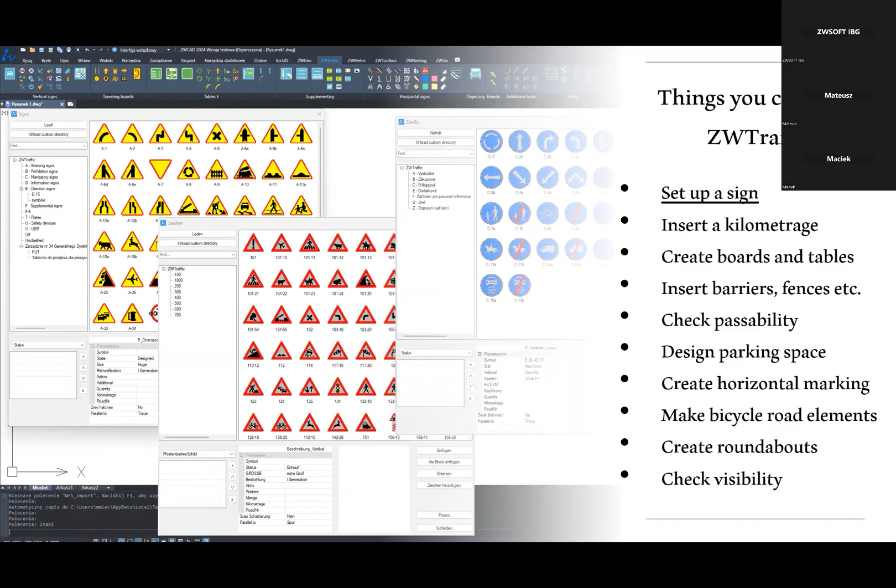Each sign already made in the program is in the form of a block. You can do plenty of options with signs, for example inserting them, reversing, adding additional information, or changing them, but that will be shown by my colleague later.

You can also make a kilometrage of road, for example for the signs or elements you're implementing on your road, as well as, for example, stops which are every 100 meters.

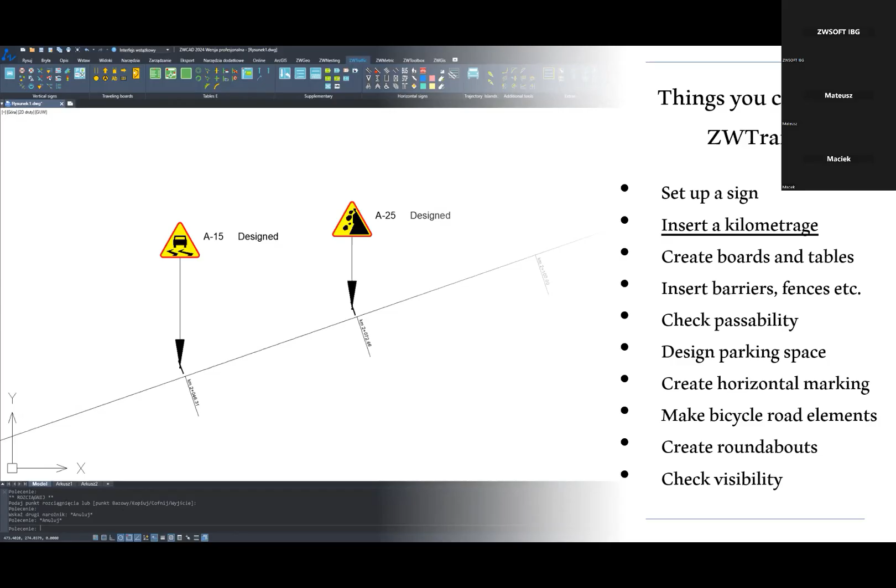The application also has plenty of functions to make custom boards and tables. For example, you can see now making a directional table with a road number, road color, town name, distance, and other additional information like arrows and kilometrage.

But there are also plenty of other tables and custom boards you can make. For example, collective information board, diversion roads, direction lane assignment, highway exit, or roundabouts.

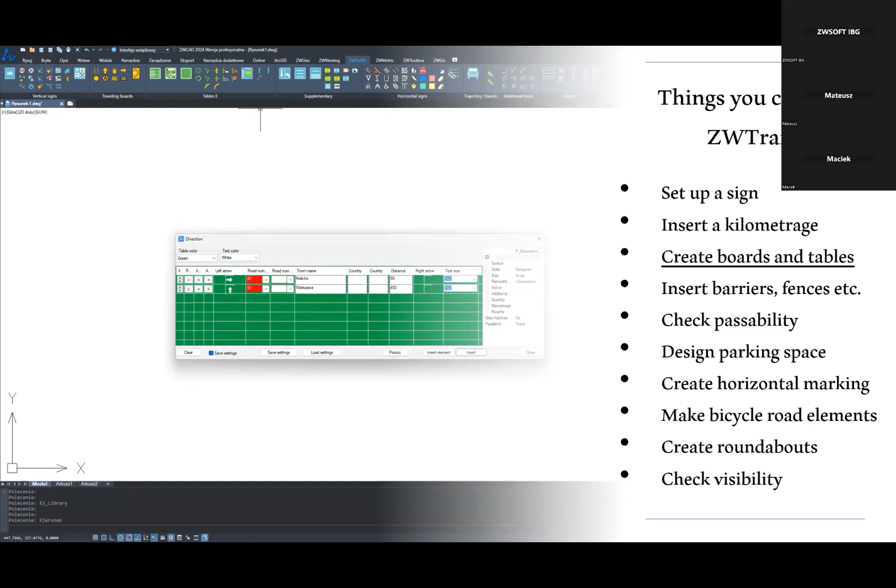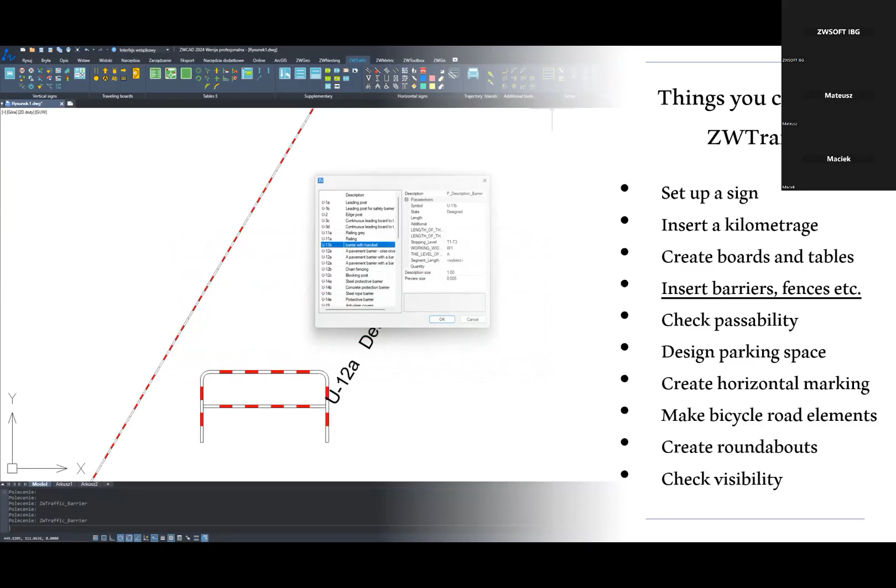You can also label and insert elements which are next to the road. For example, barriers, railings, fences, concrete barriers, permanent warning tapes, road cones, or retro reflectors.

There is also a tool to check passability of a vehicle. The ZWTraffic has a library of vehicles with specially made sizes. You can insert the vehicle view into your drawing if you need.

You can change the coloring and elements you'll be using, but basically you can check by moving a vehicle or drawing a line and checking if the vehicle is able to fit on your road.

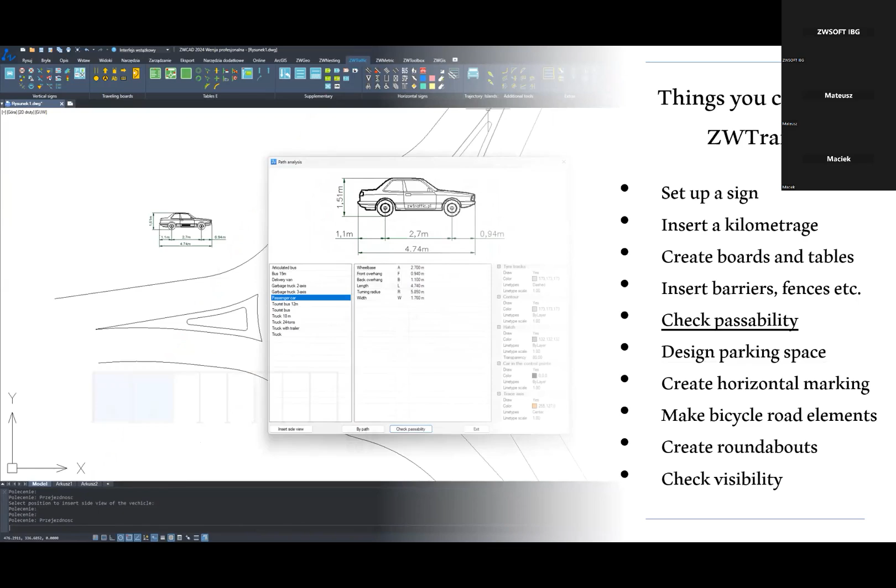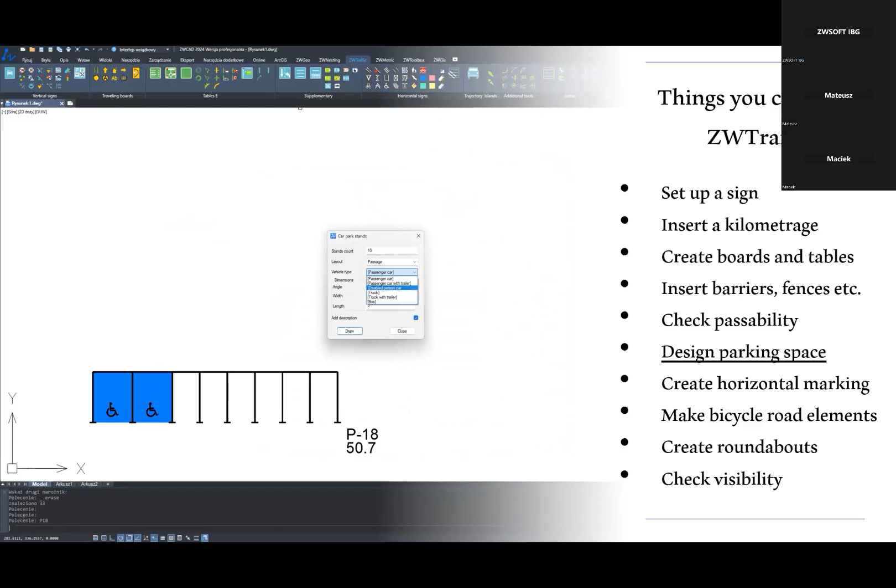You can also use our tool to create parking stands. This function has plenty of different options besides the elements of these car parks. You can change vehicle type, ways of placing or layout of these car parks, and also use various angles and dimensions for these elements.

There are also tools to create horizontal marking, such as making lines in the middle, left side, or right side. There are options to create bus stops or horizontal signs, directional arrows, and symbols that will be placed on your road.

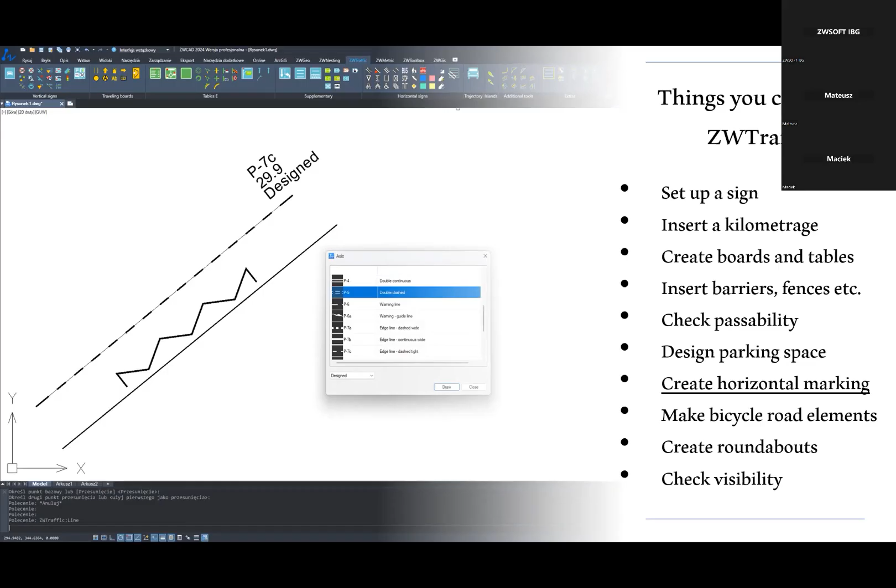Also, there are a few options for bicycle users, such as making bicycle trails, signs for bicycle roads, or just road elements, for example as you can see in the example.

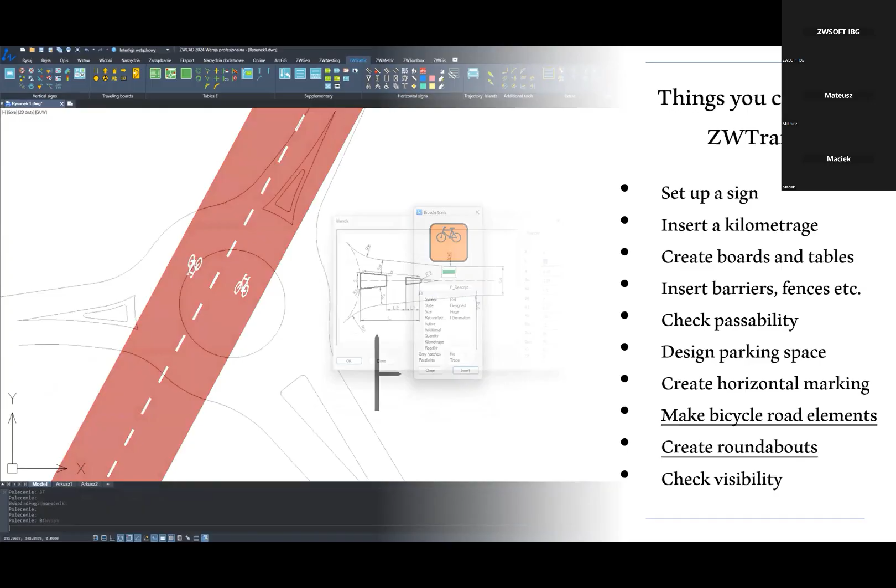Also, there are a few features to make roads or connecting roads to a roundabout, for example islands or access roads with parameters that you can change and adjust. Basically, it's just 2 clicks and you already have made roads, which normally you would need to spend some time to prepare.

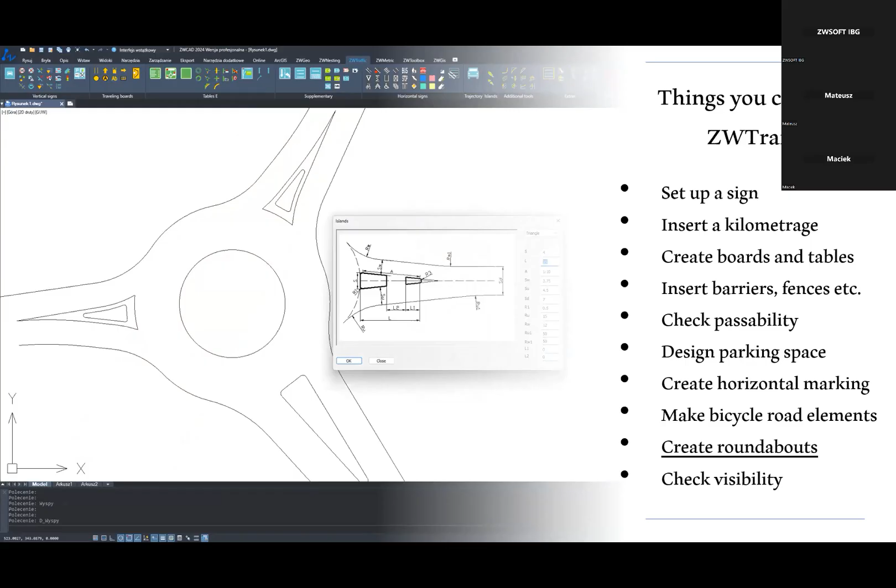There's also a visibility feature in which you can set up a few situations in which a car is placed, for example starting from a crossroad or coming to a crossroad. You can change the speed of the vehicle, car length, or elevation. Everything will fit into a visibility field.

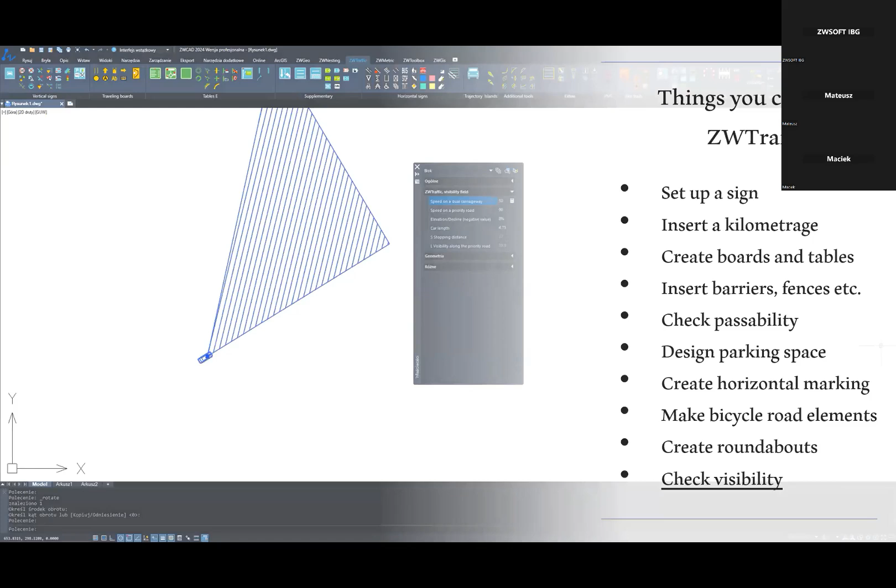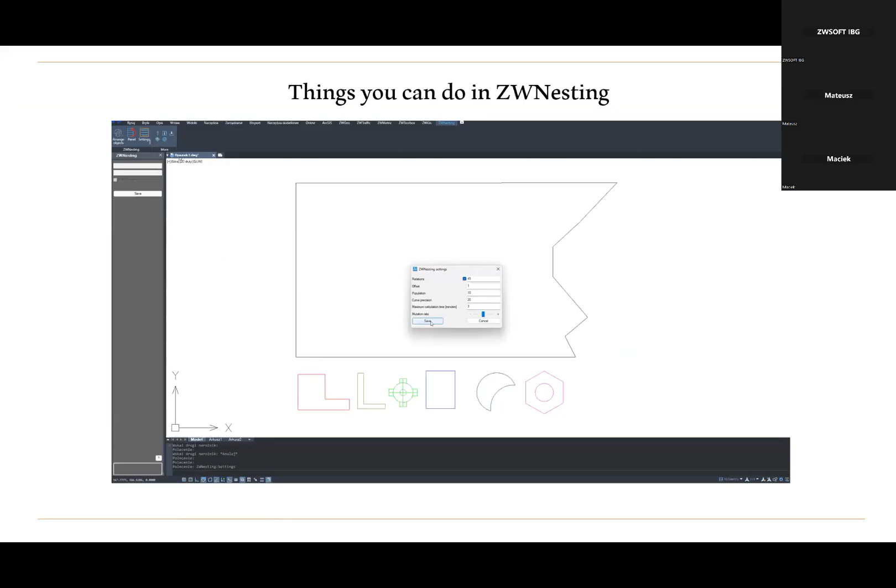You can choose in the settings a few features about the degree of rotation of elements, if they should be rotated. You can change how the application should calculate placing them, and of course you can change what objects should be placed inside. As you can see, this is a simple example, but the calculation is pretty fast and it finds the best possible solution for those elements.

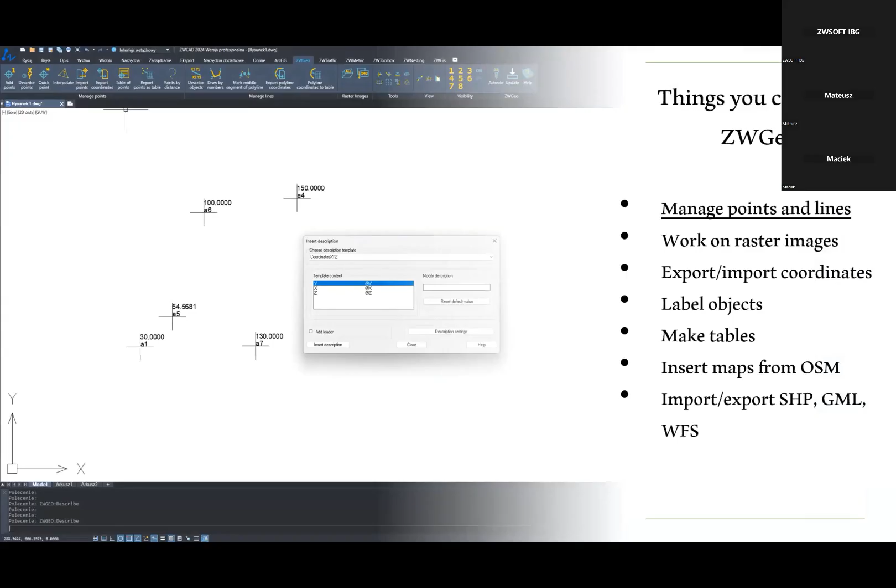And the third add-on we'll be showing you in a moment is ZWGeo. ZWGeo is an add-on for surveyors, which has plenty of features for working with a map, lines, and coordinates. For example, there's a big focus on coordinates, elevation, and number of points.

You can label points with additional features such as elevation or their distance. You can also interpolate the position of any object based on 3 points and their elevation.

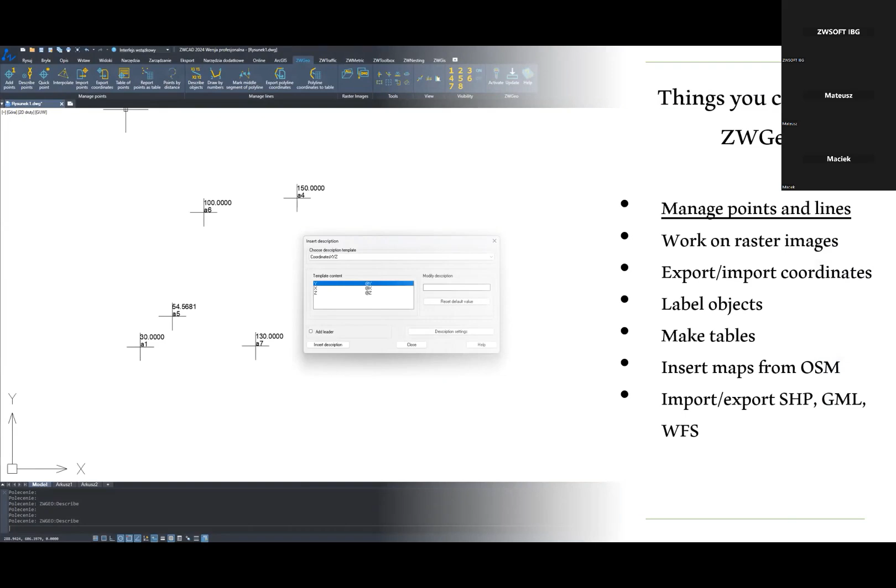ZWGeo also supports working on raster images, and there are a few functions to do so. For example, importing plenty of raster images to your drawing, or cutting a map to fit your size.

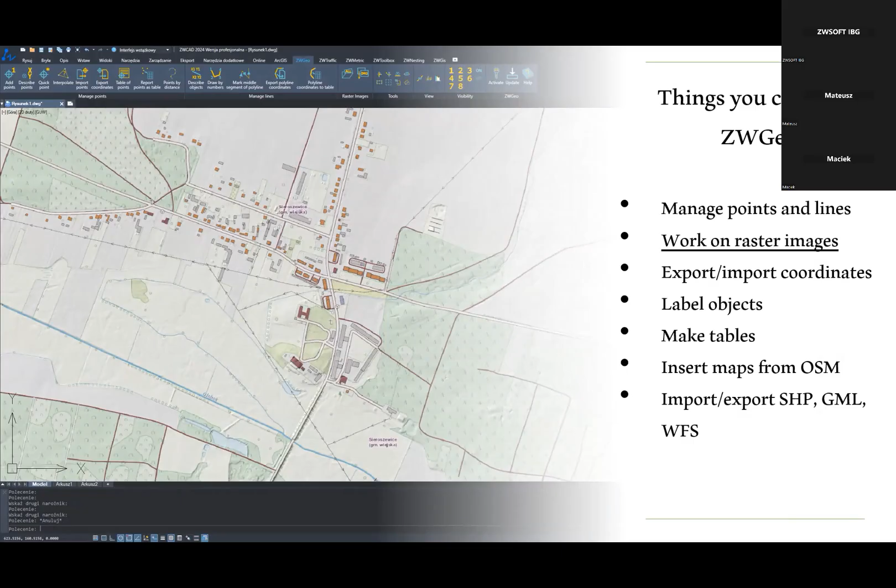This add-on also has plenty of options to export and import coordinates of points or lines, and it can be done in TXT or CSV file.

Labeling objects is also important for most surveyors, so we have plenty of tools for that. There is, for example, labeling polylines with blocks, if you need to make them in the middle of a polyline, as you can see in the example. You can also label polylines with the proper layer they are on, and label the distance of each segment. There are also ways to point coordinates and label them easily. You can also create fences by choosing a block and a distance at which they need to be placed on a polyline.

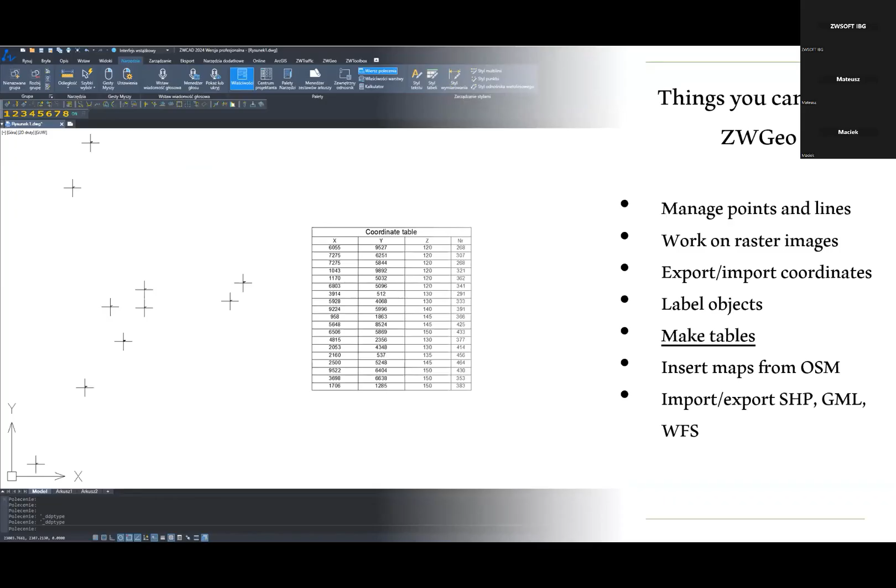A pretty important function in ZWGeo is also making tables. There are a few tools to do that, and you can also insert them into your drawing. There is also a function called the active points table, in which selected points or lines can be edited directly in the table, and every change you make will be placed directly on your drawing.

The application also has an easy connection with OpenStreetMap, where you can choose any place you want and easily place it in your drawing.

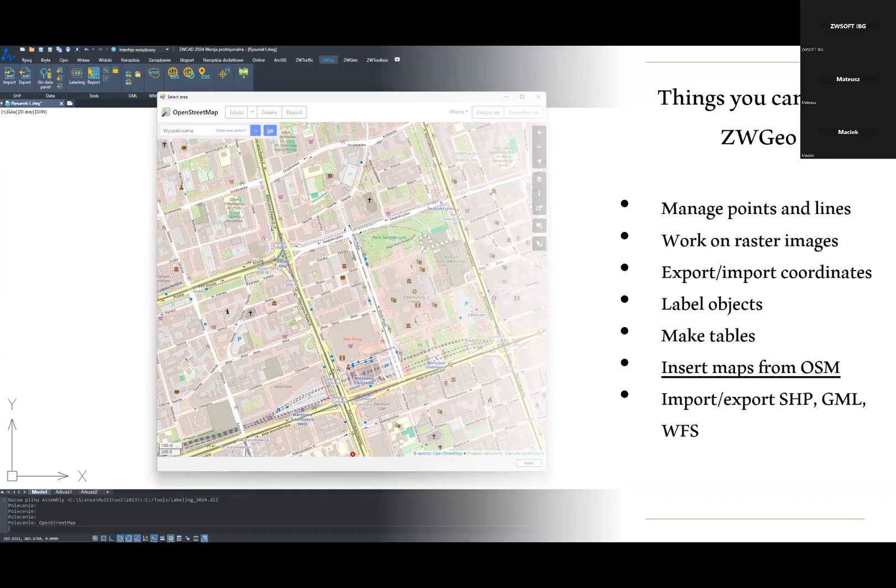Also, ZWGeo has support for GIS data, for example SHP files, GML, and WFS. You can easily import or export them, modify them, work on their properties, and label them when putting them into your drawing. Also, there is an easy way to make reports for your data.

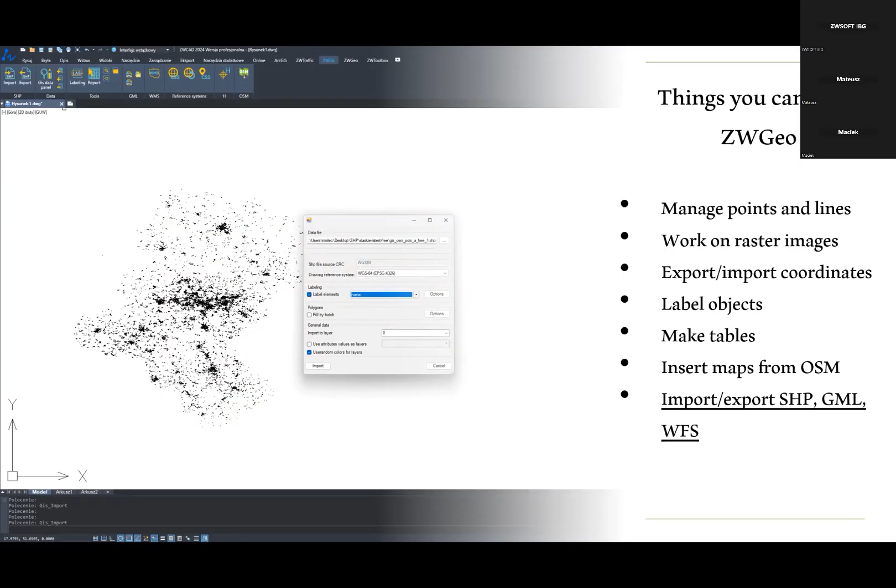There is also an option to download data from WMS servers, but this function is currently available only in Poland. That's pretty much all from my side.

Before I let Mateusz do the real life work example, let me mention one more thing: if you need any special features for your ZWTraffic, Geo, or Nesting, such as what we did for the Czech and German versions with their dedicated library of signs, or need some changes, for example with the reference system that's important when working on maps, you can always contact us, and we can try to work on making a suitable version for you.

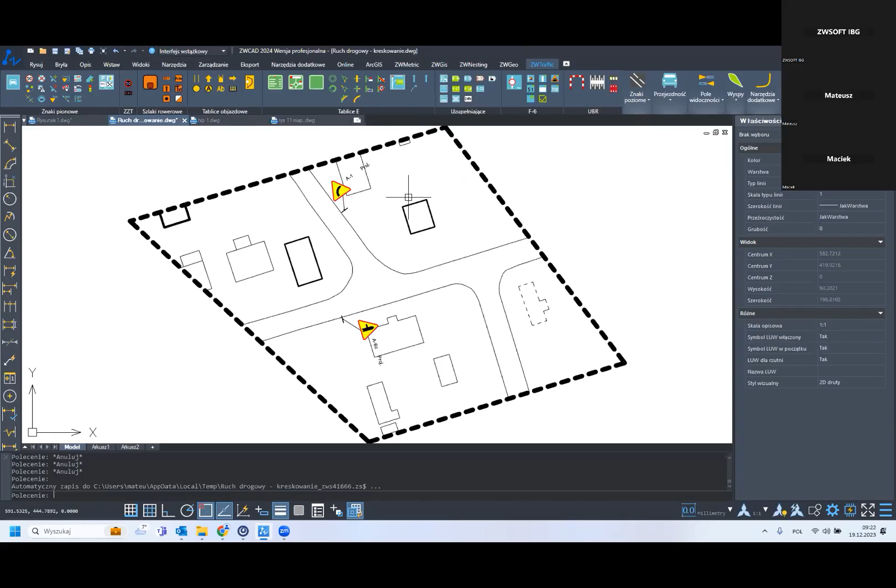Firstly, I'm going to talk about ZWTraffic because I know it the most. You can always use the commands by clicking on the icons, but it's a good idea to put the icons on the screen as a toolbar. To do this, you need to type the command 'toolbar'. So I'm using the toolbar command, and now I can choose any group.

In basic ZWCAD you only have one group here. I have ZWCAD, but I also installed many add-ons, so I have ZWGeo, ZWGIS, Metric, Nesting, and Traffic.

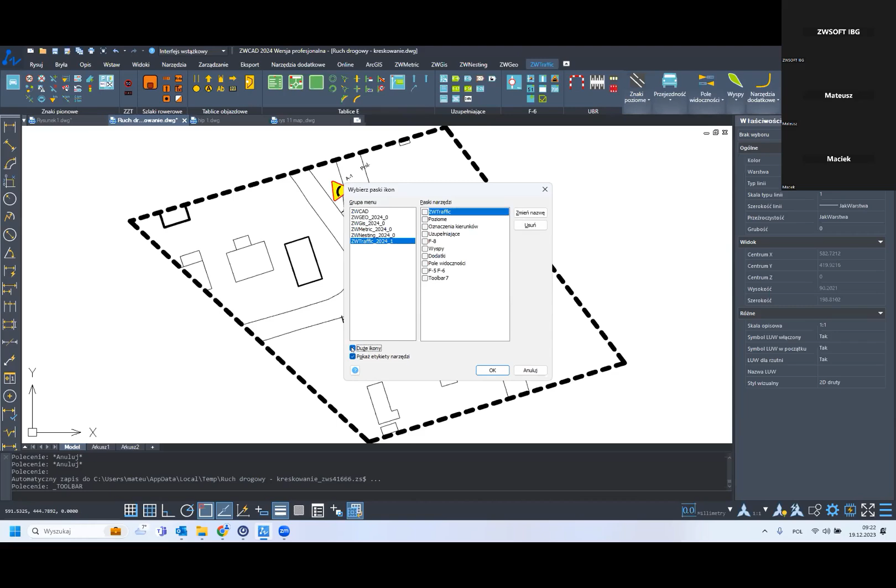If you are using a few commands very often, you can always pin a toolbar somewhere to the screen, and it looks like this. I'm going to turn them off for now. So if you want them, you can tick them; if you don't want them, you can always turn them off. If you want the icons to be large, just remember to tick the large buttons here. So I'm clicking OK, and let's move to what's most important, which is checking how these add-ons work.

We'll start with ZWTraffic, as I said, I know it the most. This is an add-on which supports work in designing traffic, something like this. Its main task is to quickly insert vertical and horizontal signs and create their list. We'll demonstrate this with an example of such a map.

Firstly, we'll try to insert a give way sign next to this road. We don't know how to do this. We just started the application, the program for the first time ever. What to do now? This is the most important thing I'll tell you today, so just focus. You don't know how to use any command, so...

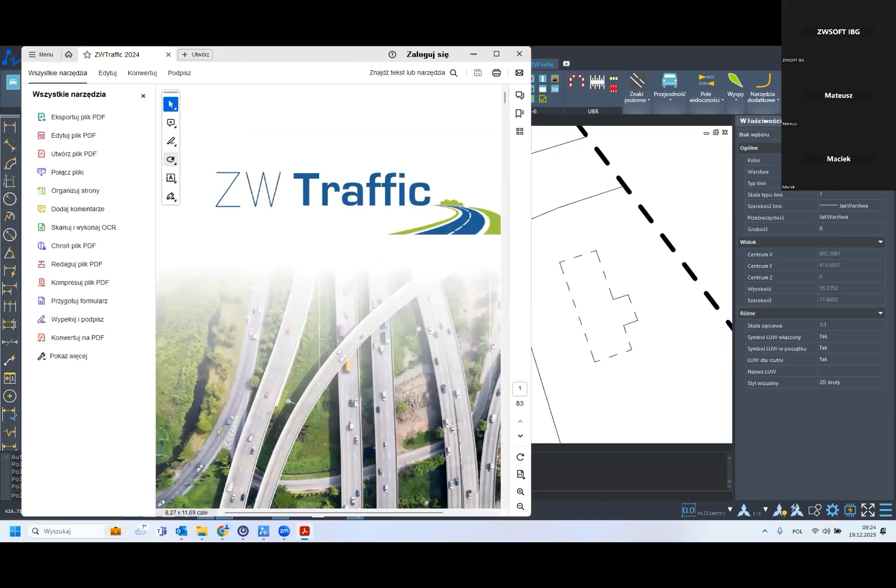Somewhere among our icons, we can find a textbook with a question mark, and it is here. If you click on a book with a question mark, a manual will appear. If we click in it, you can read how to use any of the commands in the program. I'll turn it off for now, but the manual is not everything.

Sometimes you need to do something really fast, and what to do then? If you need speed help, you can always call us, or write to our tech support. If you go to ZWCAD.pl, you can always contact us, calling this number or writing to this email. You can always use a live chat, which is here. So if you have any problem using our add-ons, just remember you can call us and ask how to use a function, how it works, okay?

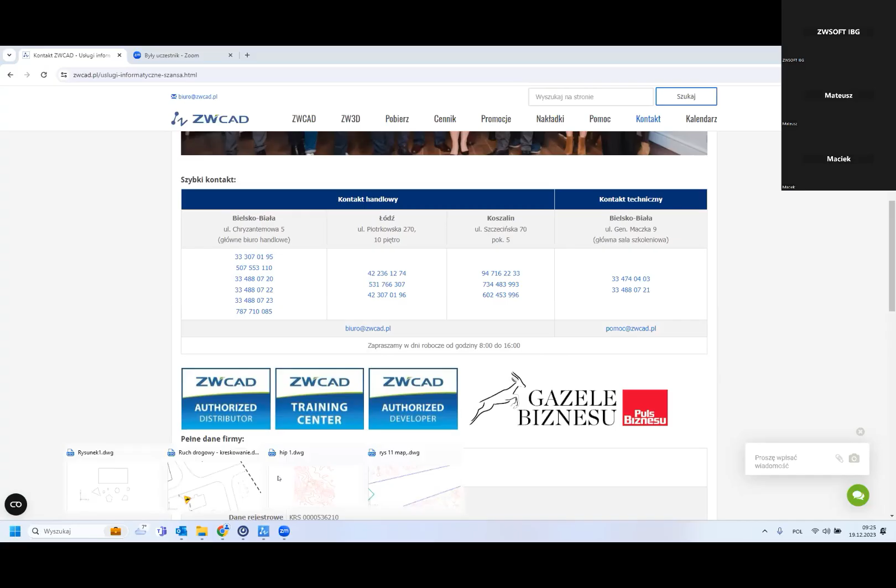So let's try to insert this road sign. I'm going back to ZWCAD. We select the symbol library, which is the first icon offered in the ZWTraffic add-on. So I am in the ZWTraffic tab, and the first icon is here. If we click on this, you will see all the road signs you can insert.

The library is updated from time to time because the law on road design changes quite often. For example, a new sign may appear, or something like this. If necessary, it is also possible to add your own signs which do not appear in any regulations. So you can choose any sign and put it into the drawing. We choose the sign A7 for give way. Of course, these are signs we are using in Poland. So we are choosing the A7.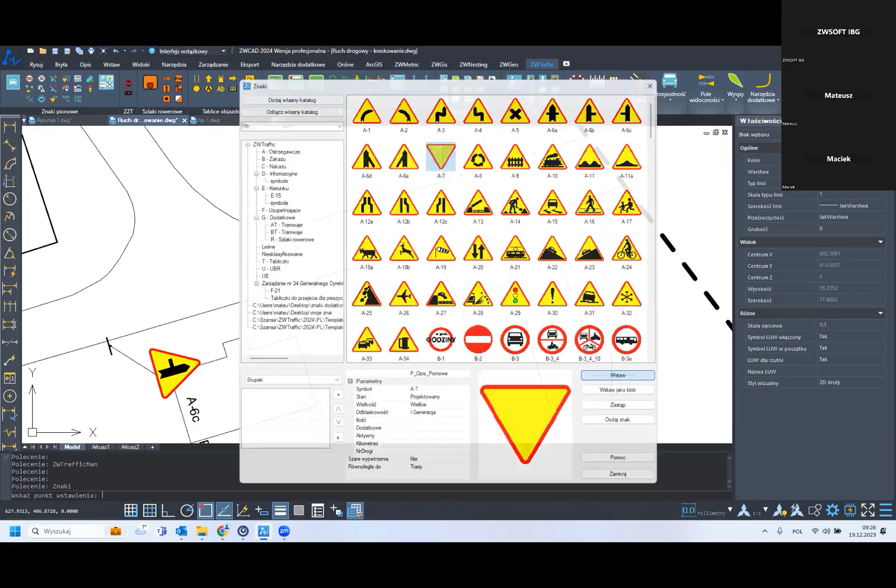And now we choose the first way of inserting the sign. There are 4 ways to insert a sign. We're choosing the first one. And now, what do we need to do? Always keep focus on what the program says to you in the command bar at the bottom, okay? So the program asks me where to put the sign. I'm choosing, for example, this place.

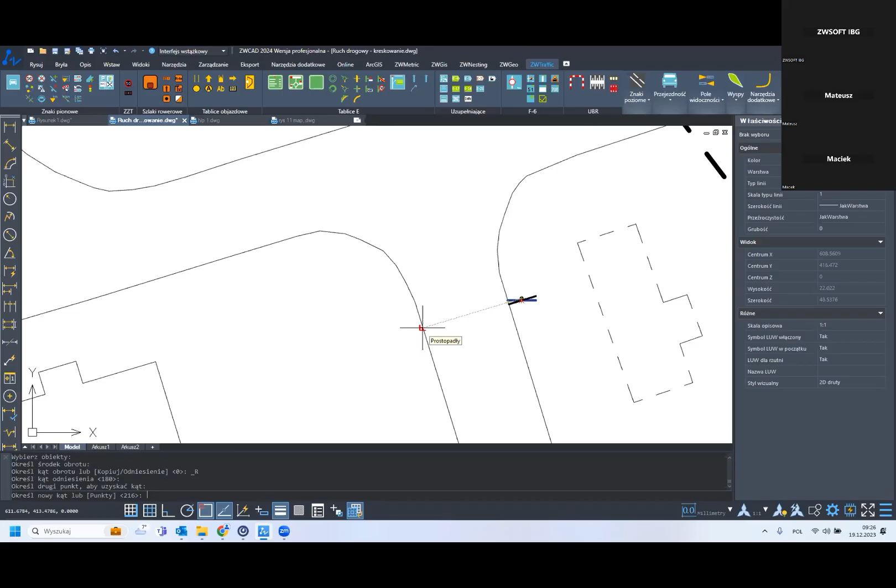Now we specify the rotation of the road sign, and the easiest way to do this is to specify a point on the other side of the road. Here you can use the object snap perpendicularity, so I find the perpendicularity. And now we define the position of the face on the reference line, for example, here. And now I'm clicking escape, escape again. Okay, we got the sign.

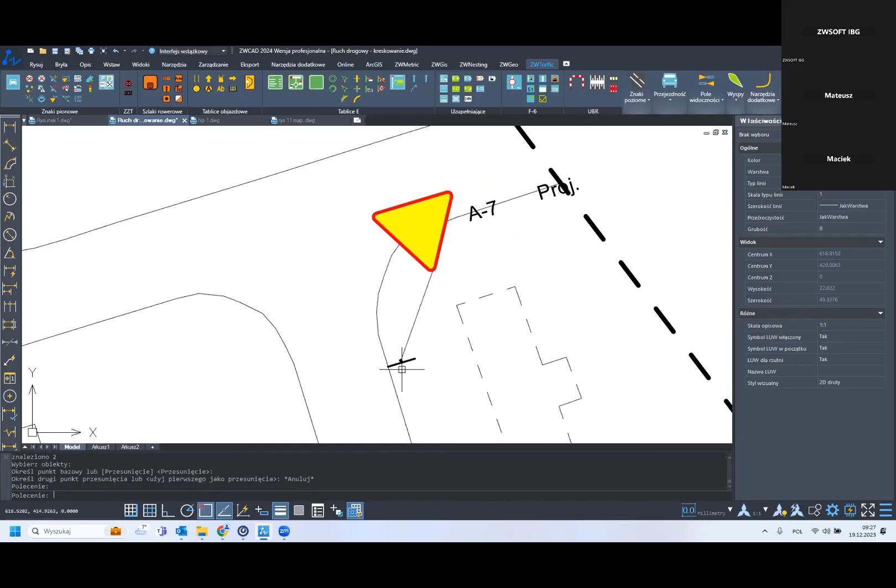What does it contain? It is very important. So we have a road post, which is here. We got a shield, that's how we call it in Polish, a shield. And we have a description, and we have a reference line, and we have a face. A face is the graphic representation of the sign.

It is important that a road sign inserted in this way should automatically be grouped. What does it mean? If I click on this sign, all of it is selected, right? Not only the face, but also the description, the pole, the shield, the reference line, all of it.

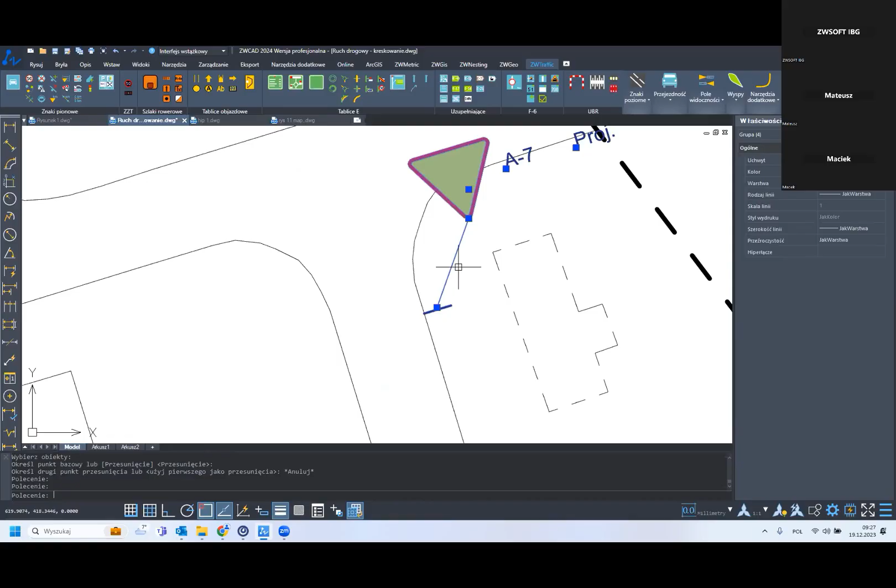But it is not always the case, because if you want to, for example, remove the description, then what? We just want to remove the description, move it. So what do we need to do? We can always try the single selection option. So I'm choosing this right now, the single selection option, and look what happens now.

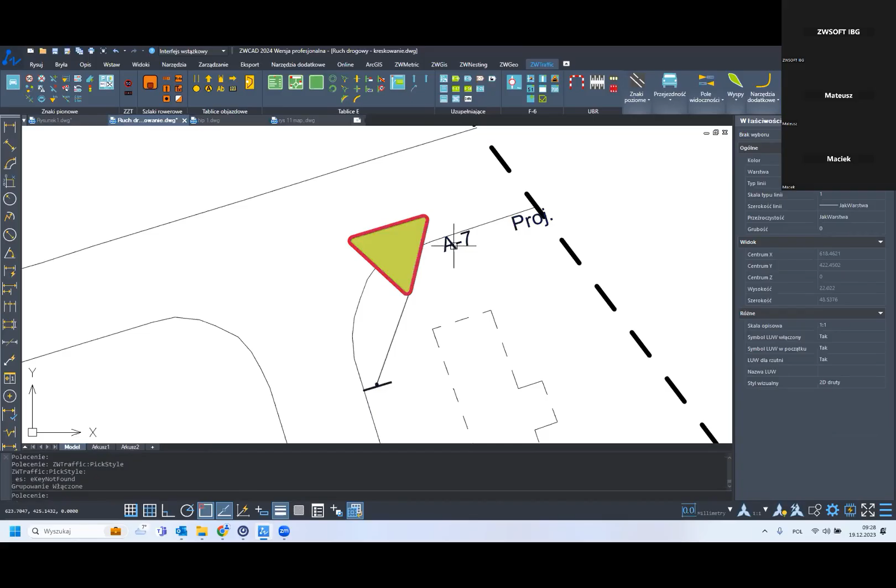I'm choosing only the description, and only the description is selected, nothing more. So I can move it a little bit, or something like this. So the grouping still works, but it is not visible, okay? I'm turning the grouping on again, and now when I choose the description, everything is selected.

When you go to the library sign and turn it on again, you'll notice there are several options for inserting a sign. For example, we have an option to insert a sign, but not only this. We can also use a block, remove any sign and put another one. And we also have an option to add sign.

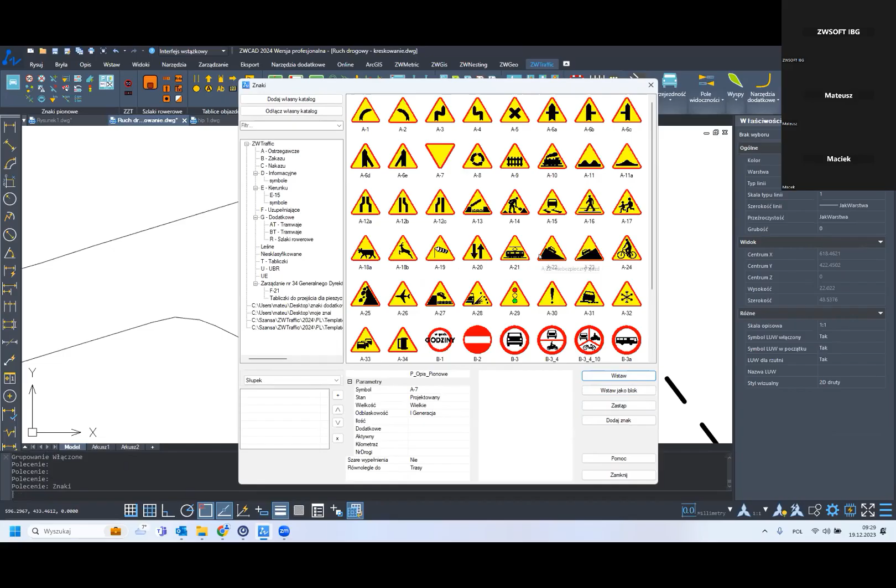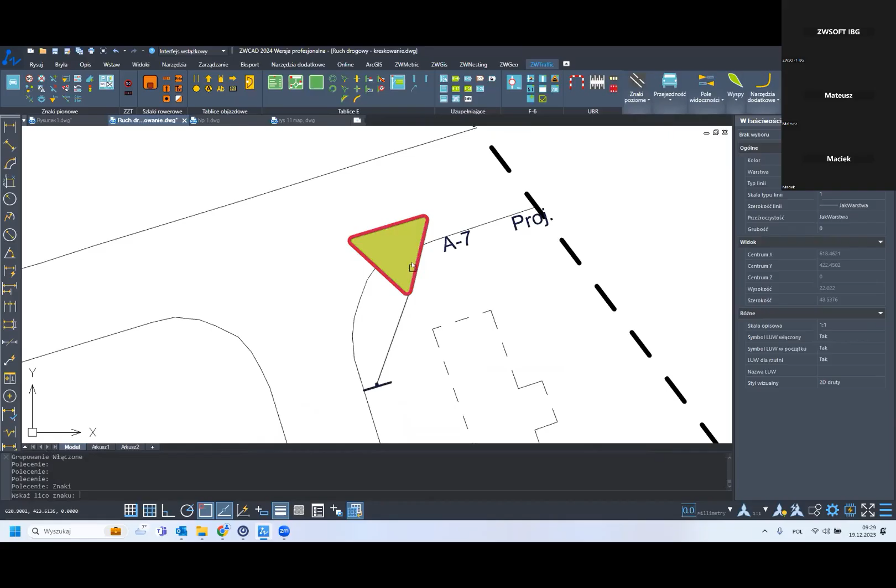I'm using add sign, but first I'm going to select a B20 sign, which is stop. Now I'm using the option add sign, not to put another sign, but to add a sign to the existing one. So I'm choosing add sign, and now all I have to do is choose any sign in our project. Clicking escape, the job is already done.

Now I will insert some signs quickly, because I want to show you something important. I've got two signs here, one sign here, one sign here, and I'm going to add another one. For example, this one, I'm going to put it somewhere in here. Okay, it looks like this.

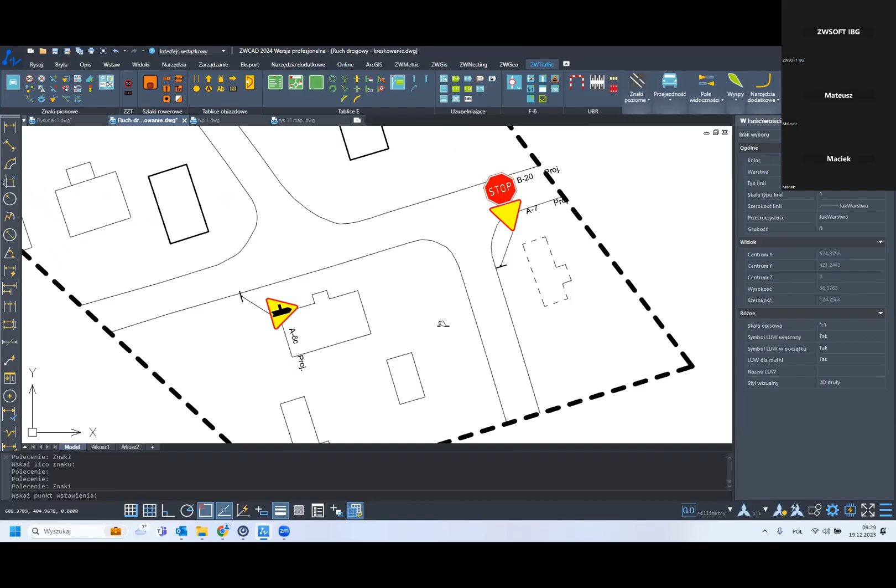Why do we need many signs? When we design an area with many signs, which happens often in Poland, it would be nice to be able to count them. So this is what the sign list option is for. Just look at this. I'm going to use the option for sign list. It allows me to create a table.

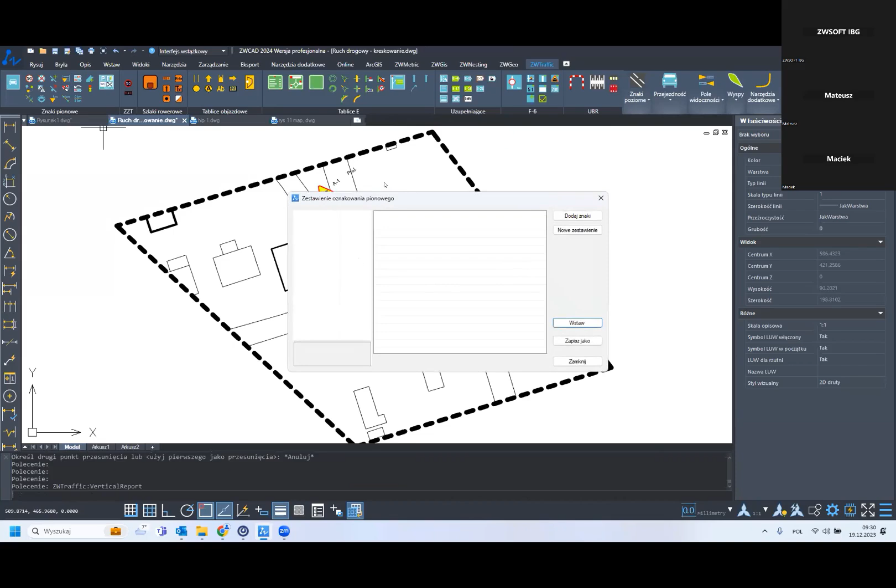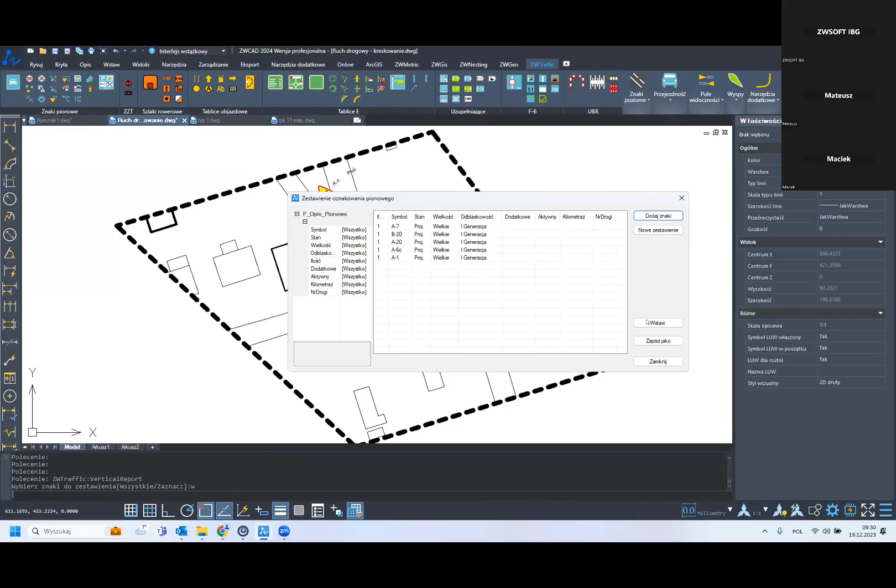I just need to add some signs. I'm choosing in the command bar that I want all of them. I can choose which signs to add to the table, but I can also choose all of them. So I'm choosing all of them. And now I can put the table somewhere on the screen. And it looks like this.

So we do not need to count them one by one. We can simply make a table with all the signs we have used.

Let's move to horizontal signs for a second. Here we have many options, for example parking spaces. So I'm going to use parking spaces. I'm turning on the command. And now we can, for example, specify the size of the parking space. You can also specify the number of parking spaces, but it is not necessary.

For now I've got 0 parking spaces. What does it mean? Does it mean we're going to draw 0 parking spaces? It's ridiculous, no. If we set the number of spaces as 0, the program will adjust the number of spaces automatically. So I'm going to use the option drawing.

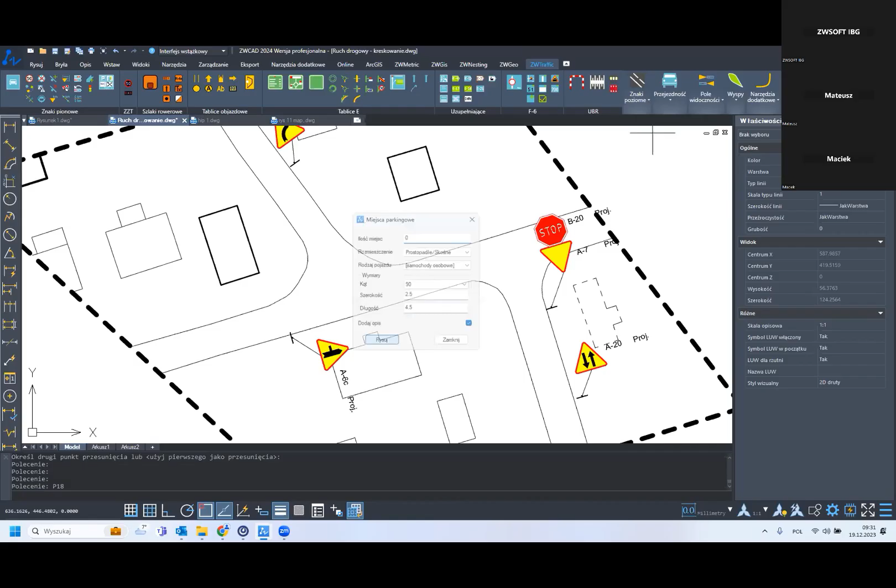Now we choose the insertion point, for example somewhere in here. Then we need to choose the angle. Right, can you see it? The program adjusts the number of spaces automatically, right?

So I'm choosing, for example, this place. And now we need to specify the position of the description, for example here. One more thing. And it is done. Easy, right?

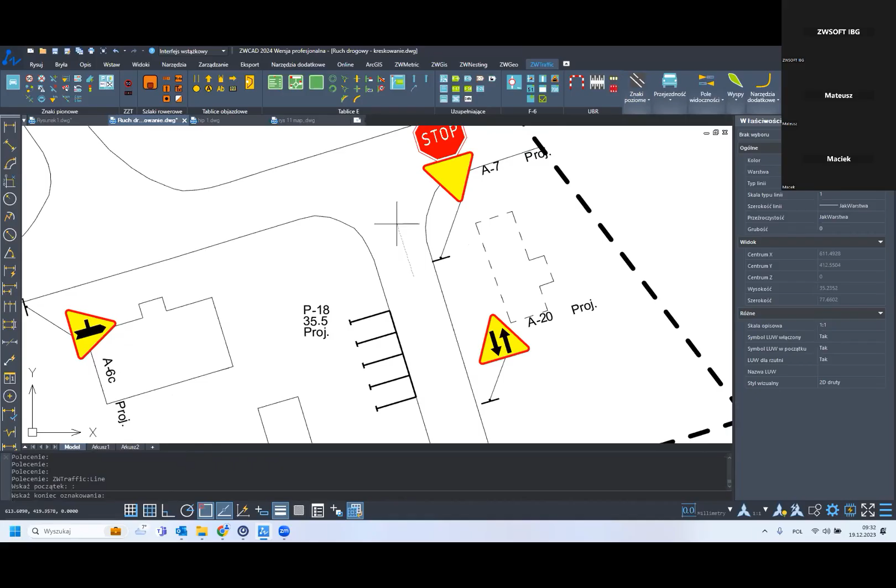So let's also try to insert some lane demarcation lines. Select a line, for example let me check, for example double line, and I'm choosing drawing. Specify where we want to insert it. So I'm choosing where is the beginning, where is the end. I'm gonna start again, sorry, again. For example, from here to here. And now, as you can see, we've got a double line on the road.

Now we specify where to insert the description, of course. We can choose what is the rotation of this description, and the job is already done.

Recently, a visibility option was also added. Users of the add-on have often asked about it. It allows us to check the visibility of a selected traffic participant.

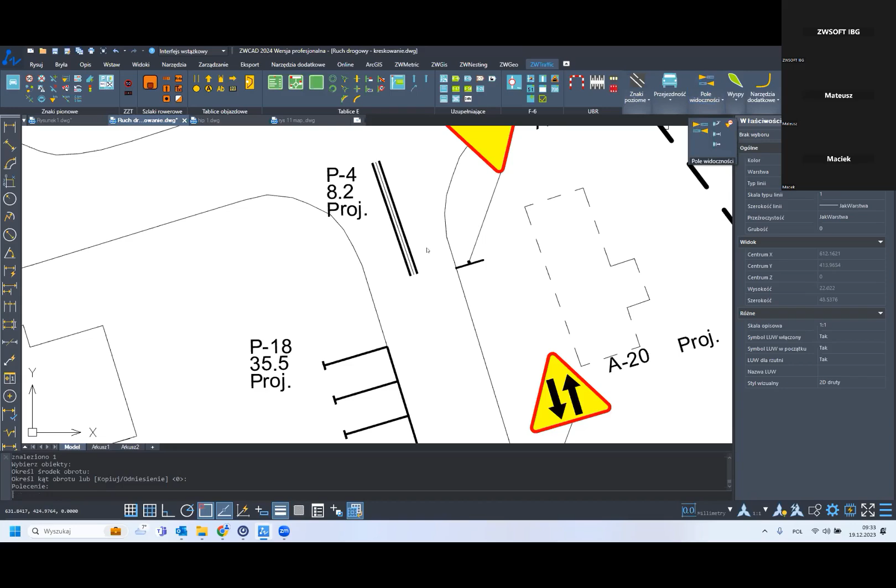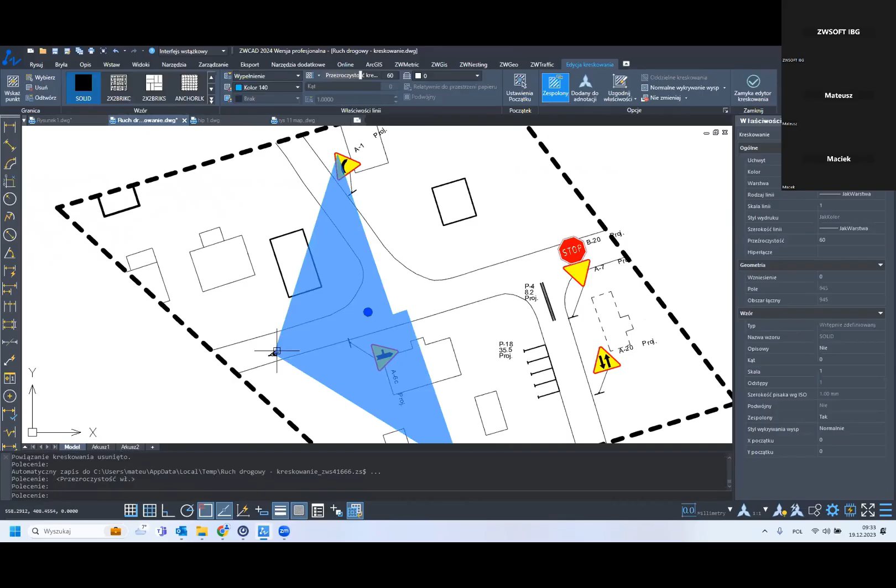I'm going to show you this, like this. Okay, so we are choosing a biker, and we can check the visibility of this biker, and it looks like this. I can always turn on the transparency, and it looks like this. Okay, I'm going to delete this. So this is the visibility.

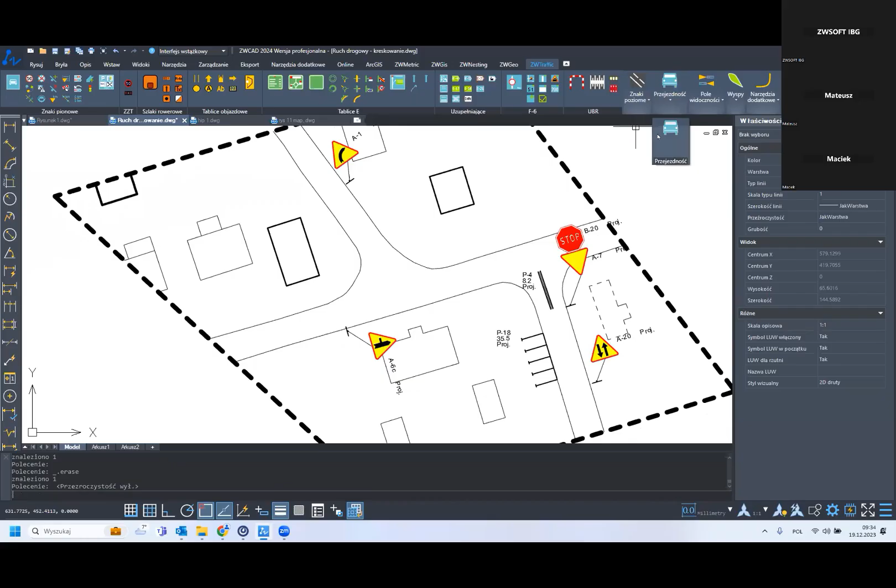We can also have the option for checking the passability, and it's very interesting. For example, we've got a bus which needs to come from this way to this. And we can check if the bus fits in this intersection. So I'm choosing passability. We can choose any car you want. I'm going to use a big bus, okay.

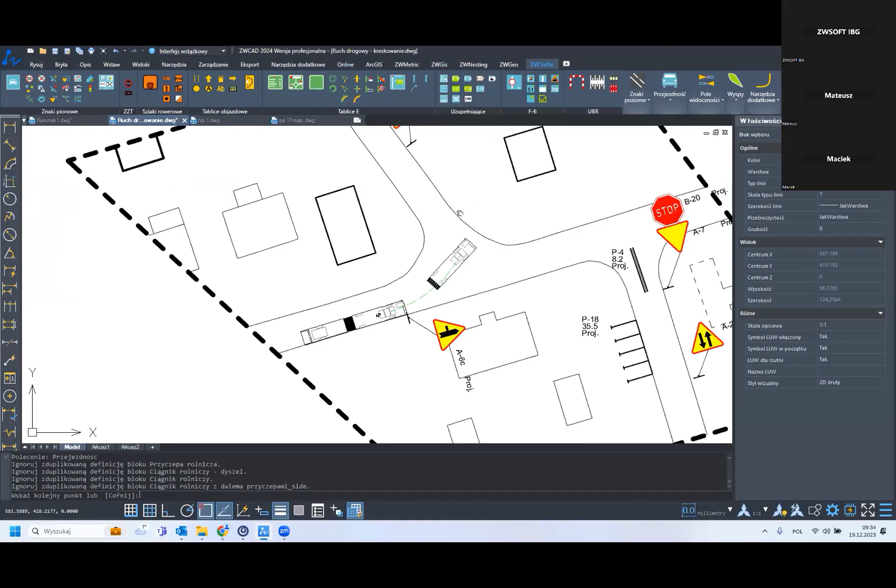I'm choosing checking the passability, and I'm choosing the first point, another point, and another point. As you can see, whatever I do, the bus will not fit through this intersection. So what do we have to do? For example, we can put a sign that says the bus cannot come in here, or we can make a bigger intersection, because this bus cannot fit in this intersection.

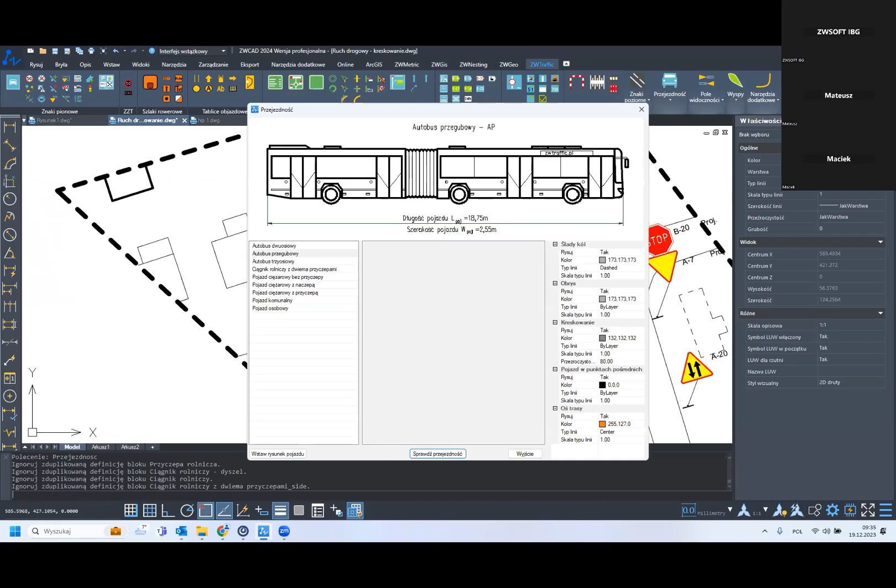I'm clicking escape, escape again. Let me do one thing. I want to delete something, and now you can see that this bus can fit in this intersection. So we changed the drawing, but we still stay on the topic of the ZWTraffic add-on.

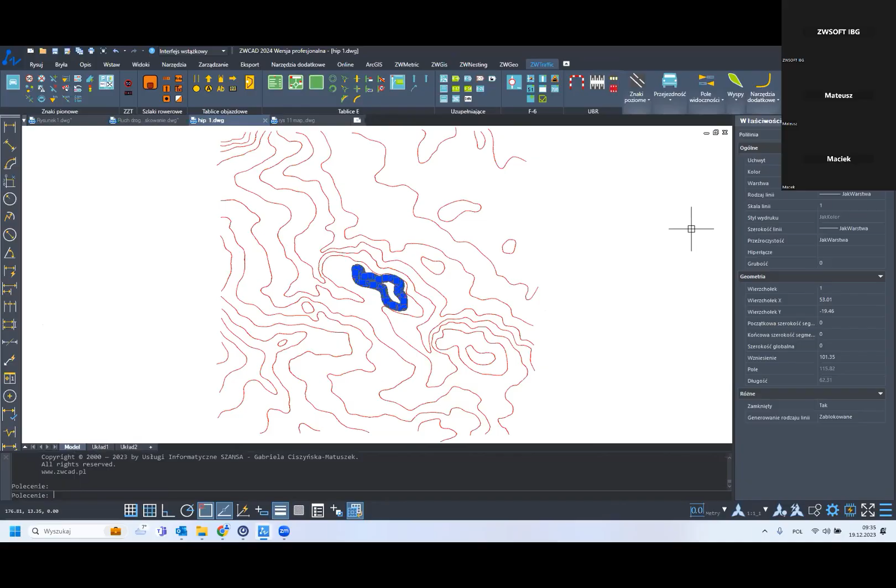We have a simple tool to make a section. If you want the command to work properly, we need multiple lines with different elevations. We can check it in the properties. Just for example, this line has elevation 101. Another one, for example, has elevation 97. And another one, for example, has elevation 95. So we got many lines with different elevations.

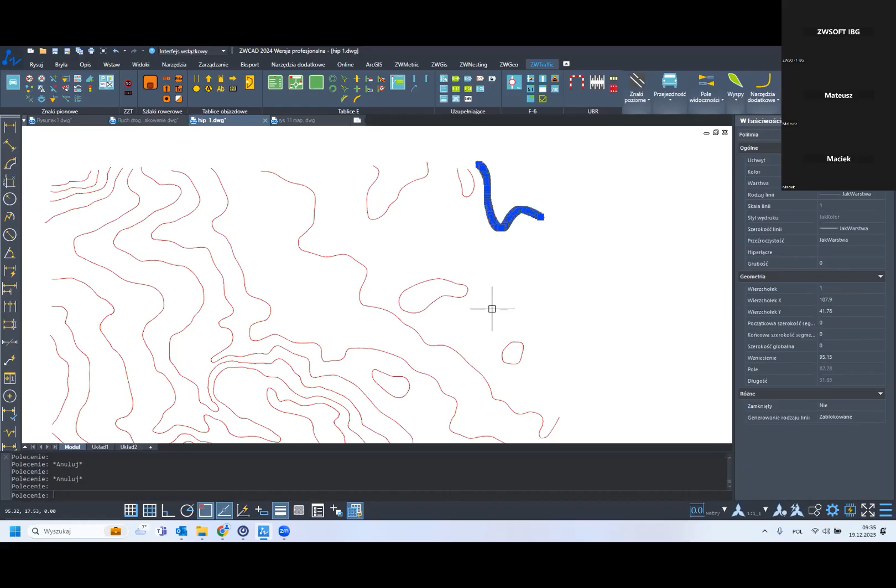We can always check the Z coordinate in the properties. Also, when we rotate the view like this, as you can see, the lines are not at the same level. I'm gonna change the view to the upside view. And now we will check the section.

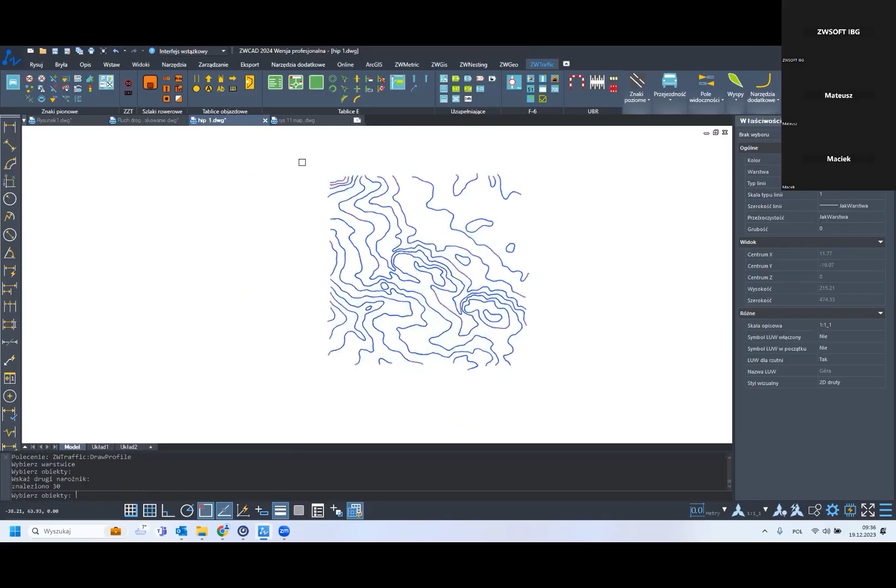I'm turning on the ZWTraffic command for section. Now we need to choose the objects, and I'm choosing all of them. I'm confirming it with enter. Now I'm choosing the start point, the end point, and the job is already done. As you can see, the section has been made, and it looks like this. But remember, we need lines that are at different elevations - that's the rule.

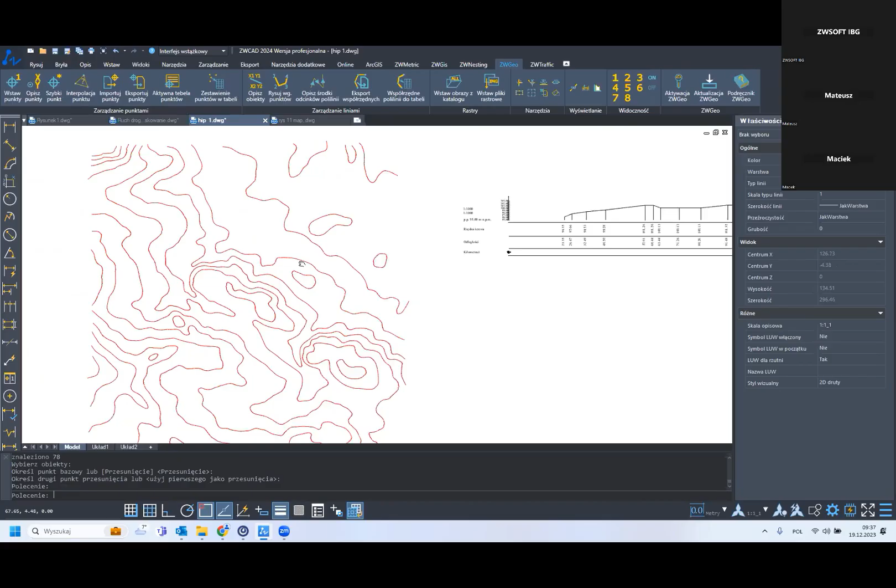So let's move on to the ZWGeo add-on. I'm gonna choose the add-on ZWGeo. ZWGeo is an add-on to help you work on maps. It allows you to insert coordinates into a drawing, but not only coordinates.

Okay, just select the first command and we are gonna check how it works. The first command is insert the points. Remember, the program always asks me about something in the command bar. So always, if you are using a command for the first time, remember to check the command bar, because the program will help you by asking about specify point, elevation, anything. Just remember, the command bar is your best friend.

So at the bottom of this program, you can see that the program asks me about the series marking. I will type ABC, nothing special, just ABC. Now the program asks me about a number. I confirm 1 by clicking enter. And now I can specify points at the selected locations. So I'm choosing this one, and this one, for example, this one.

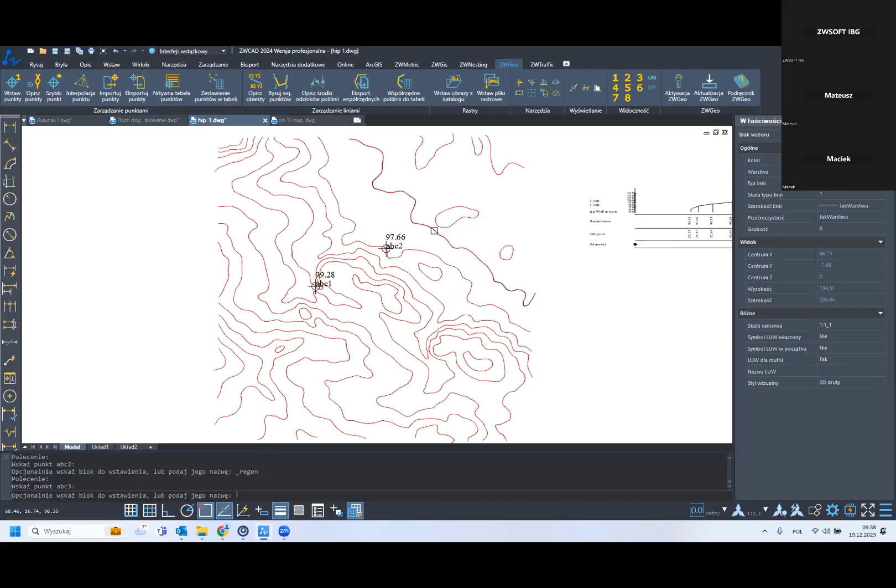As we remember from the previous command, these lines are not at the same elevation, right? That's why we got 99 here, 97 here, 96 here, and 95 here. The information next to the inserted point is just the height, nothing else, just the Z coordinate. But it does not have to look like this - instead of height, we can insert points with coordinates, for example.

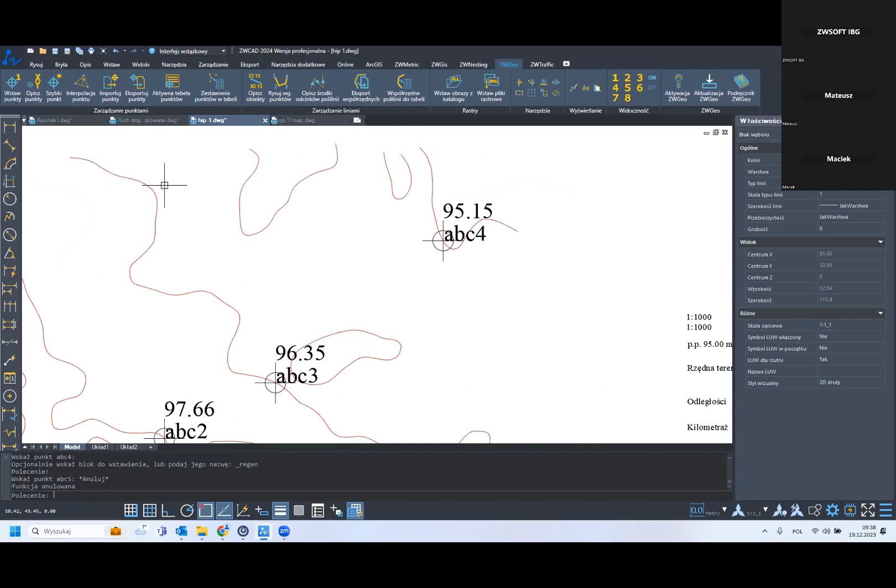So let's choose another command. I'm clicking escape and choosing another command. And here we can choose coordinates. So I'm choosing coordinates, inserting the point, and I'm clicking on the map - the first one, second one, third one, and so on. So we can check the height, we can check the coordinates, whatever you want.

There are many options. The inserted points can be listed in a table. Just a second - you probably saw that the text size is different, but we can always change this in the settings. When I turn on the command again, I can change the scale of the text, for example, to 1. And now if I turn on the command, as you can see, the text is normal size. So you can always change this.

Let's go to the next command. The inserted points can be listed in a table. It's similar to this - we got some signs here, and we got a table. So we can do pretty much the same thing with the points we got here.

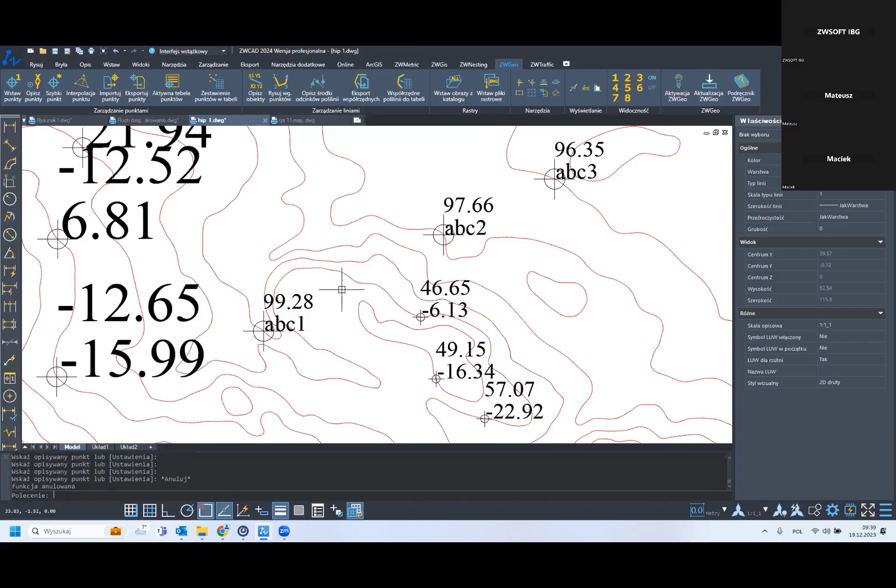So we are choosing the command for the table. Now we need to choose what points we want to insert in this table. I'm choosing a few of them. And now I can just insert the table somewhere on the screen. And it looks like this.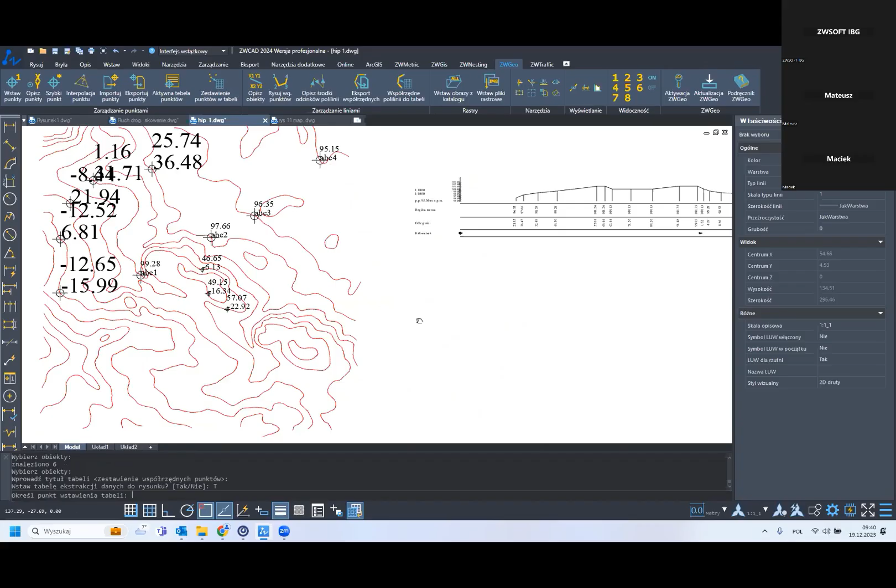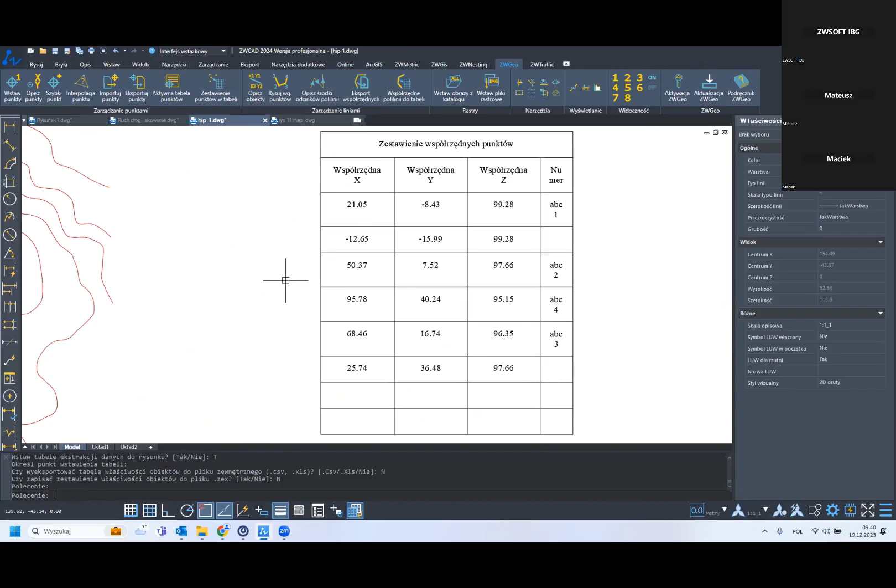Easy. So ZWGeo has simple commands, including one for creating a grid of crosses. This is created so that you know more or less what the distances are between the selected objects.

Such a grid of crosses can be made by just a few clicks. Let's go to another drawing with a different map, and we are going to try this command. So I'm choosing ZWGeo, and I'm turning on the command for grid of crosses.

The program asks me now what is the distance between the crosses. Usually it is 50 or 100 meters, depending on the scale at which we want to print the map. Let's enter, for example, 50 and confirm it with enter.

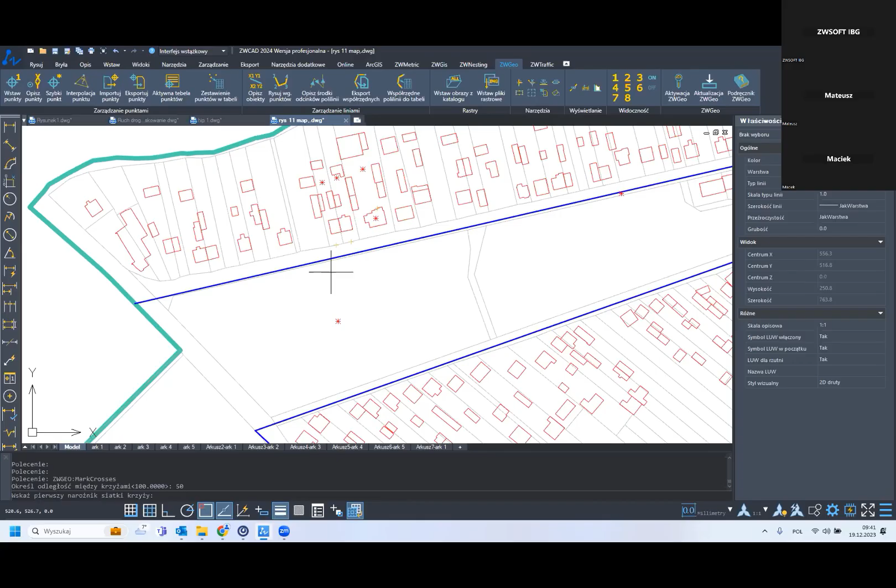Then we specify the bottom left corner here, and the top right corner here. And actually we are done. We can see that there is a grid of crosses.

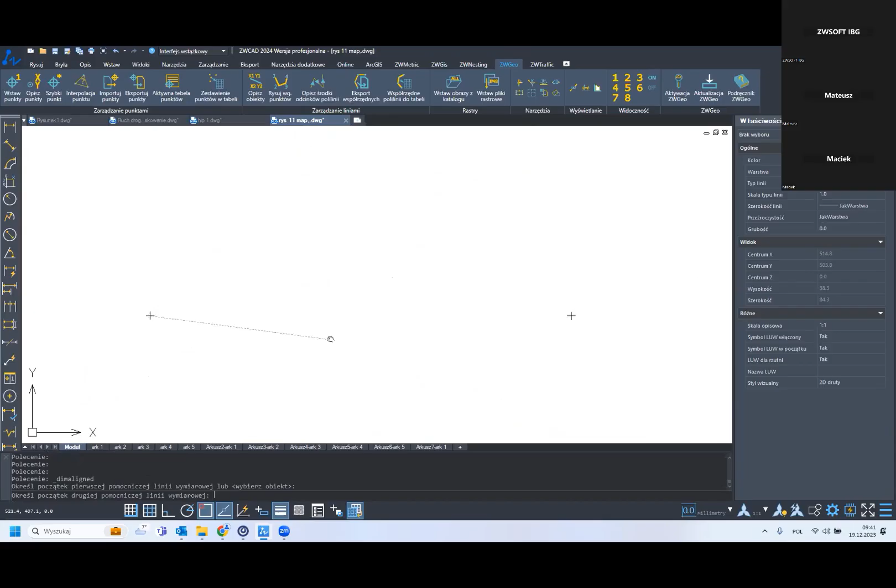I'm gonna zoom into it and make a dimension from this point to this point. As you can see, the distance is perfectly 50 meters, because I'm working in such a unit in this map. So this is a grid of crosses.

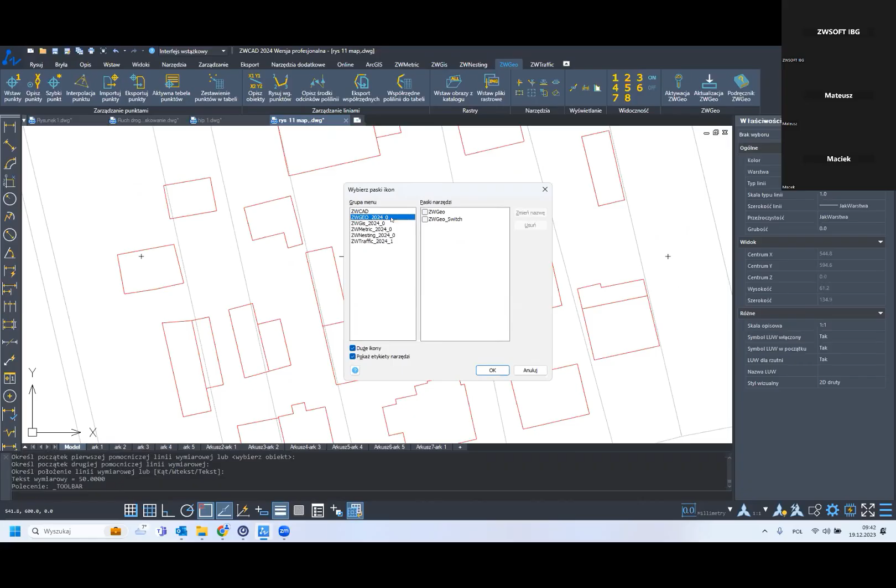We also have a very simple tool here to control the visibility of the layers. It is worth pulling out the toolbar with these numbers. Can you see these yellow numbers? I'm gonna put them in a toolbar. So I'm using the toolbar command again: Toolbar, ZWGeo, and I'm using ZWGeo switch.

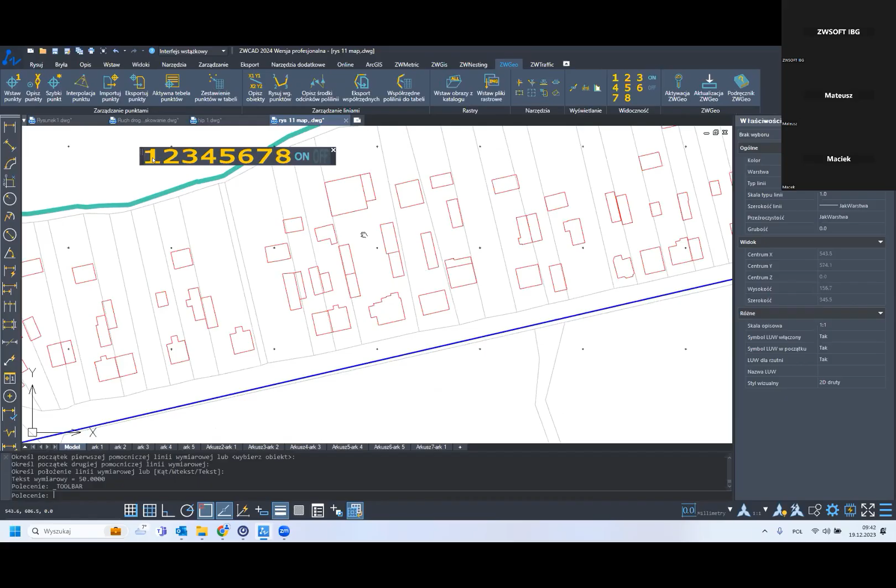These numbers are the same, but I can use them even if I'm in another tab. I'm in the drawing tab and I still can use these numbers. So what I'm gonna do now is choose one number, for example 1, and choose any building in the drawing, confirm it with enter. And now I'm choosing number 2, and choosing any parcel in the drawing, confirm it with enter.

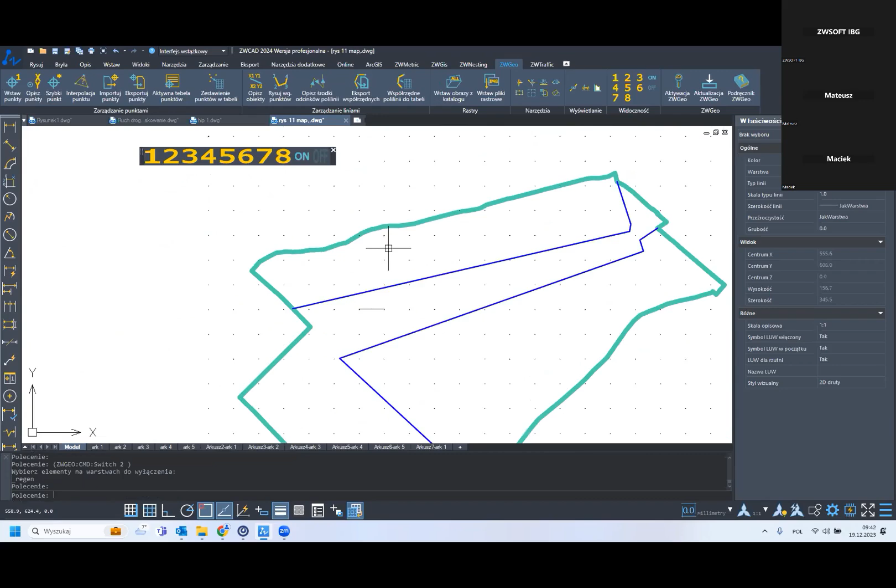Do you see what happens now? I'm choosing number 1, the buildings show in the drawing. I'm choosing number 2 and the parcels show - 2, 1, 1, 2. You can always change the visibility of the layers this way. It's just faster than using layers from the drawing tab, although you can always use that too.

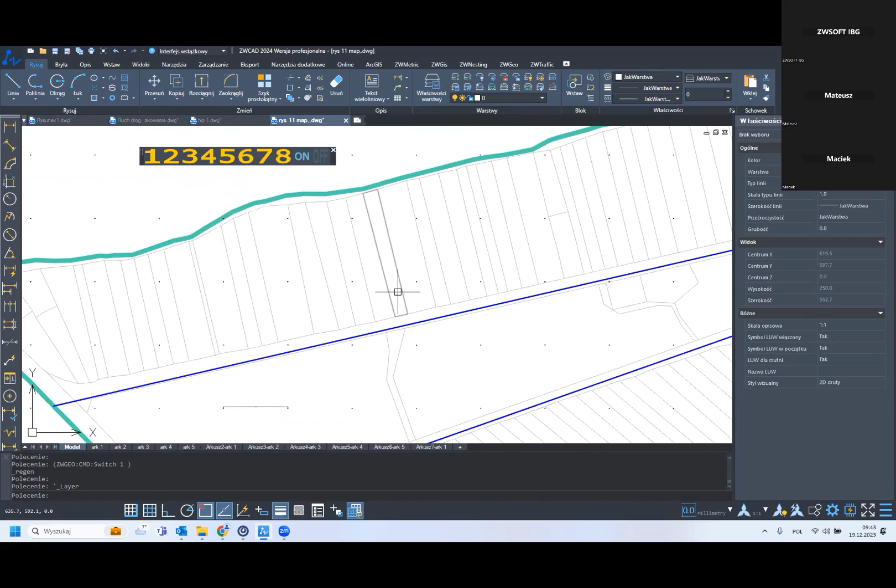So the last add-on I wanted to show you is ZWNesting. I'm gonna change the drawing for now. First of all, what can we use it for? Let's imagine we have a large sheet of steel, this rectangle, and now we need to cut out some elements from it. It's obvious we want to use as little material as possible.

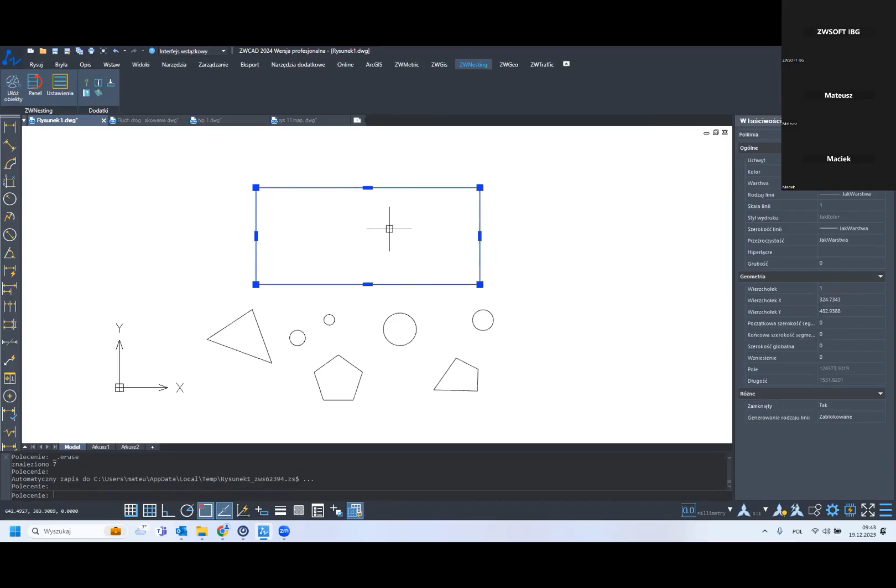So we choose the first command in ZWNesting - as you can see, there isn't much to choose from. Now the program asks me to choose the frame, so I'm choosing my rectangle. Now the program asks me to choose the objects, so I'm choosing all these objects, confirming with enter, and letting it begin.

As you can see, the program places all the objects in a way that they take as little space as possible. We can, of course, change the minimum distances between these objects.

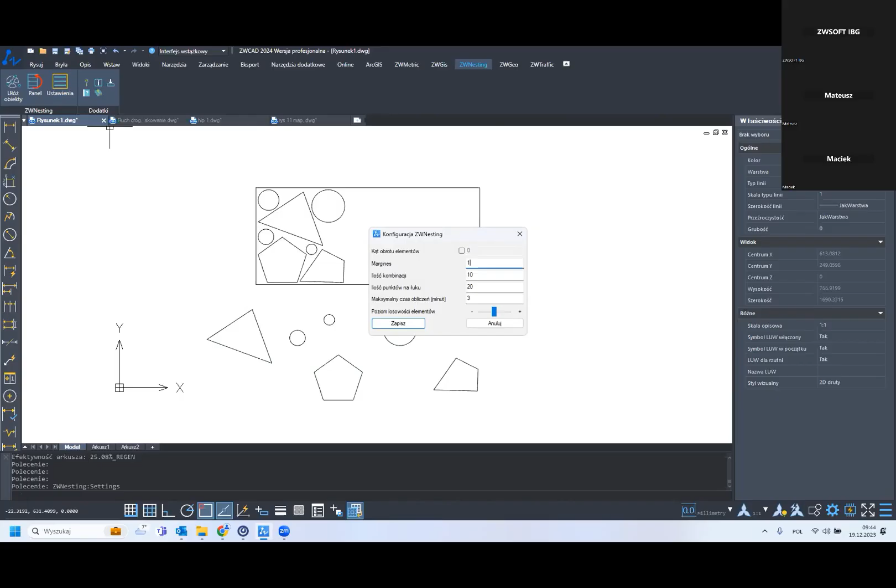I'm gonna end this now and change the distances, for example, to 15. I'll save this, delete the current result, and use the command again. So firstly, I'm choosing the frame, then the objects, confirming with enter, and this is how it's done. Do you see that the distances are bigger than before? That's because I changed this in the settings.

So I think that's all from me. If you have any questions, you can ask me, and if I'm able, I will try to answer. If I'm not able, I will leave you my email and you can always text me to ask any question about it. Thank you for your attention.

I see that there are no other questions. So thank you very much for coming and listening to all of us. It was a pleasure to be here, and thank you, really, Rose, for giving us a chance to be here today. Okay, no problem, it's our pleasure, Maciek.